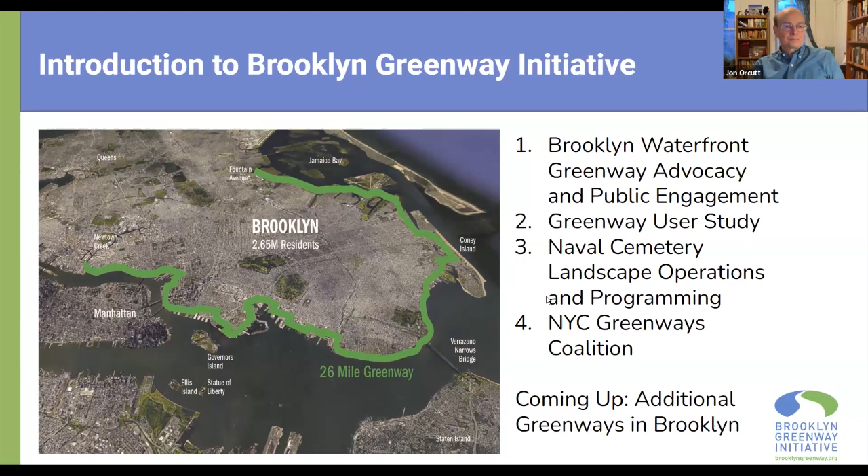So we have declared 2024 the year of New York City Greenways, because there is so much happening in greenways this year. Starting off, our 20th anniversary, as I mentioned, really looking to build enthusiasm around that. The completion of the citywide greenways plan this December—we'll be talking more about that in this presentation.

And then also another big milestone that we're excited about this year is the release of the Brooklyn Waterfront Greenway user study. And so with that, we'll hand things over to Rob Pirani, who will be giving a bit of the history of Brooklyn Greenway Initiative.

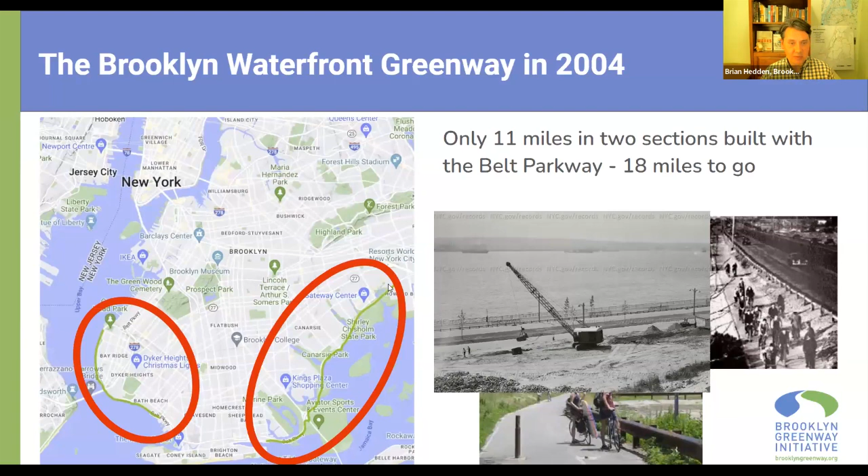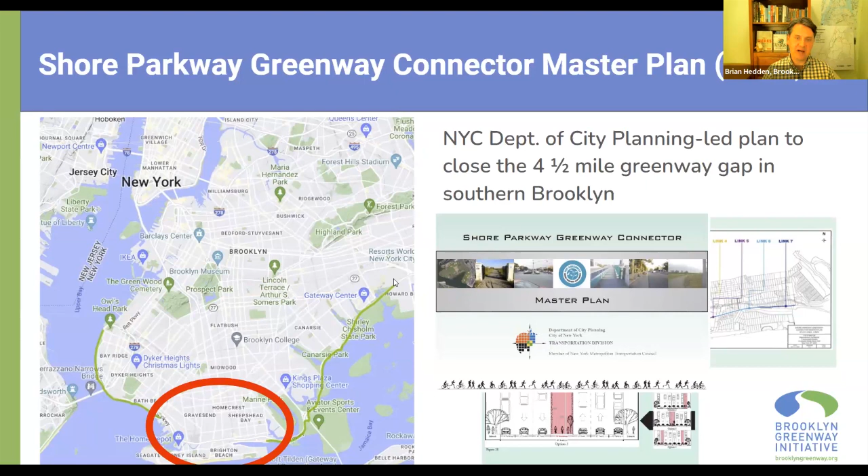You had 11 miles and 2 distinct sections, and there was a big gap in the middle - nothing that went further north than Bay Ridge. So at that point, you got a couple of different plans over the next few years to address that gap. One was led by the city administration, the Department of City Planning. They did a study and published a plan, the Shore Parkway Greenway Connector Master Plan, focused entirely on closing the 4.5-mile gap between Bath Beach and Sheepshead Bay. Also, as we've been talking about, you've had a number of years of advocacy spurred on by BGI and other activists.

As Jon talked about, the Department of Transportation did the comprehensive study and published the Brooklyn Waterfront Greenway Implementation Plan. That's where you detailed the routes, the rights-of-way, street design layouts, for 14 miles of waterfront from Greenpoint to Sunset Park. That really set up the blueprint for how to get the Greenway done project by project.

So if you skip ahead to today, the result of that has been there are now 10 new miles of Greenway along the Brooklyn waterfront where there used to be 11. So it's now 21 miles done out of 29. 8 of those miles were done in Northern Brooklyn, coming off the implementation plan's blueprint. The other 2 miles were done in Southern Brooklyn, basically close to a form that was envisioned by that Shore Parkway connector plan, and also with a little bit of a boost from the Jamaica Bay implementation plan that Jon referenced.

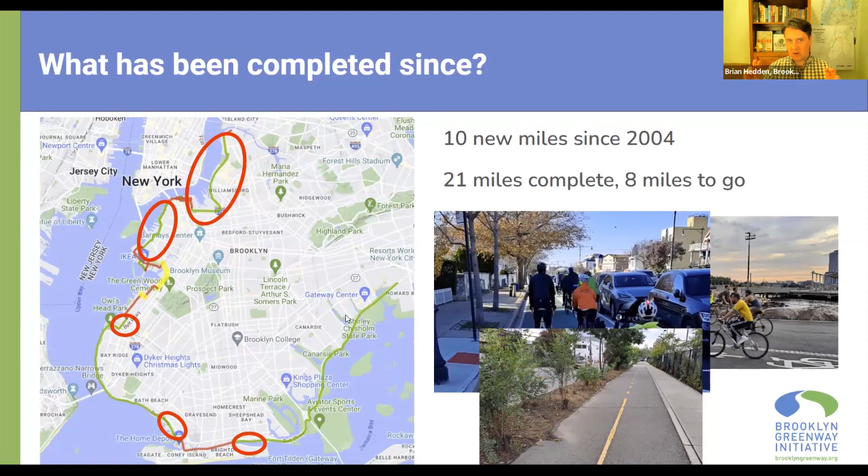I also want to break this down a little bit in terms of what are we considering a completed segment of Greenway, because it really helps to think about how we want to look at the future segments of Greenway as they're getting done.

One of them, and this is really just in Brooklyn Bridge Park, a little bit of off-street park trail that managed to get done as part of the whole 29-mile project. That is fully off the street grid. It's into the park, it has direct access to the waterfront, and that is for the park that runs by the bridge between Piers 1 and Pier 6.

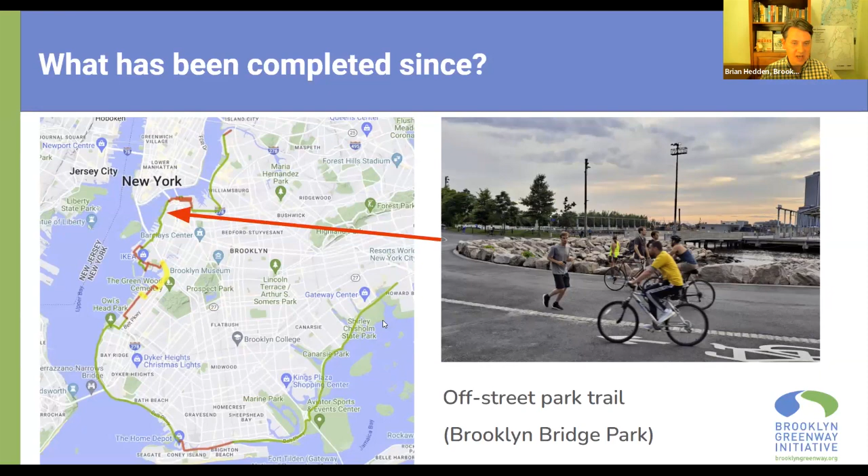A lot of what was envisioned by that implementation plan was the grade-separated and landscaped Greenway path. This is because a lot of the waterfront space and prospective park space in Brooklyn is already spoken for. A lot of what the Brooklyn Waterfront Greenway, in Northern Brooklyn in particular, does is run along the city street grid and connect park and waterfront destinations to each other rather than running directly on the waterfront itself. That's a case where you see the streets being reconfigured to bring in this idea of a linear landscape path through the borough.

So in the photos we're looking at here, you're looking at a sidewalk and a bike path that are at the same grade. They're separated from any moving cars, or even separated from parked cars, with trees, with plants, and with a raised curb.

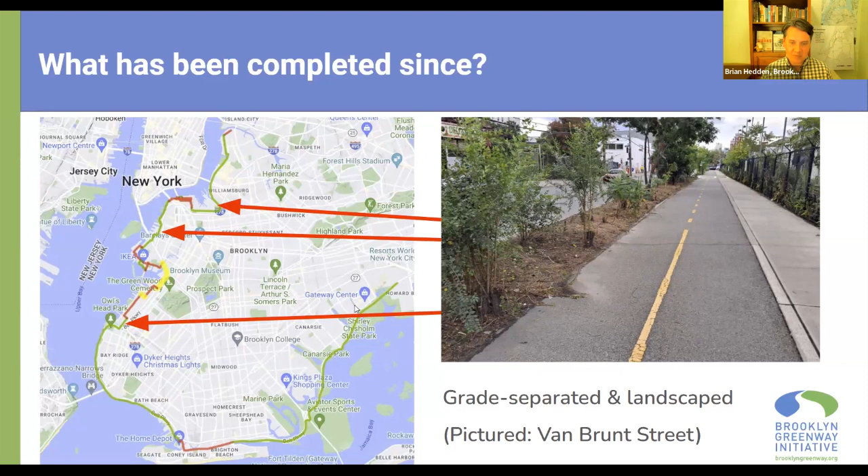Here in the last 20 years and the 10 new miles, you'll see this sort of Greenway on the perimeter of the Brooklyn Navy Yard and on the perimeter of Brooklyn Army Terminal, and then further along into the Columbia waterfront on Van Brunt Street. These kinds of projects are the big ones. These are the capital projects that are expensive and take a lot of time, as Jon was talking about, maybe too much time, but when the opportunity is there, it's worth it, and you get a really nice piece of Greenway and linear park out of it.

Then the other part, as Jon was talking about, there's the protected two-way bike path. It's the cheaper and faster way to bring safe and comfortable biking infrastructure to a Greenway route. Bikes here are physically separated from moving traffic with either concrete Jersey barriers or parked cars. This picture is from the ribbon cutting day at Emmons Avenue in Sheepshead Bay. This method has also been applied on the Shore Parkway Service Road in Bath Beach and Gravesend, and also on Kent Avenue, north of the Navy Yard in Williamsburg.

This is something that brings the Greenway to a usable status. It really opens up the number of casual users that are able to use it. But on the same side, it's not necessarily that landscaped linear corridor that we'd like to see as the ideal. Even though this is a tool being used to complete the Greenway, it doesn't mean the city can't go back in after the fact and essentially upgrade it to that landscaped, grade-separated status.

And that really is effectively what happened along the Navy Yard perimeter. The Greenway started off in its first few years as a protected bike lane there, and then eventually was upgraded through that capital project, which took several years of planning and funding and construction to get done.

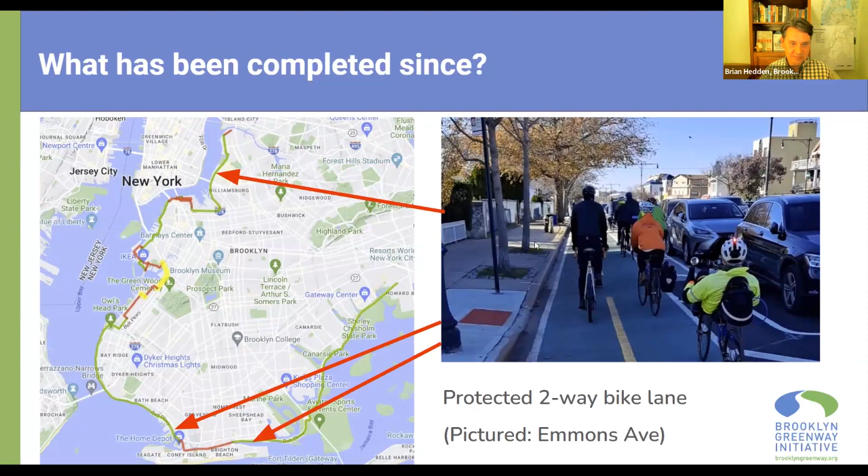So with all of that, it's now 21 miles out of 29 complete. What's in the pipeline? What's the prospects for getting those last 8 miles done?

I want to highlight a few projects that lead into 4 miles of Greenway that we're pretty optimistic about. They're in construction, or in the pipeline to become construction, or very close to going into that pipeline. We're optimistic these Greenway segments can open up in the next few years. Not necessarily this year, in most cases not next year, but before we start calling out years with the words 2030, these 4 miles should definitely be set, we hope.

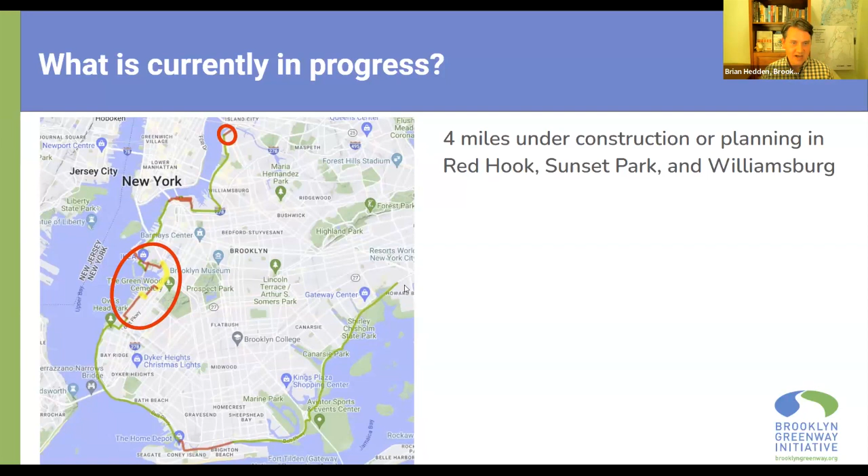So with that, I'll start with Hamilton Avenue and 3rd Avenue down to 29th Street. This is an example of a Greenway project under construction. You wouldn't necessarily know that to look at it because it's tied into a lot of underground water utility work, and that work is what's really driving the length of the construction time needed here. Construction actually started in 2021.

Part of the delay here is that a lot of these projects rely on underground survey work that isn't really proven right or wrong until they start construction and start digging. In this particular case, they found out the surveys were wrong, and that ended up causing this project to go into further redesigns and further delays. The current estimate is completing this in early 2025. But I'd say with all of these capital projects, every construction estimate comes with an asterisk because it can come with delays not currently planned by the agencies building these out.

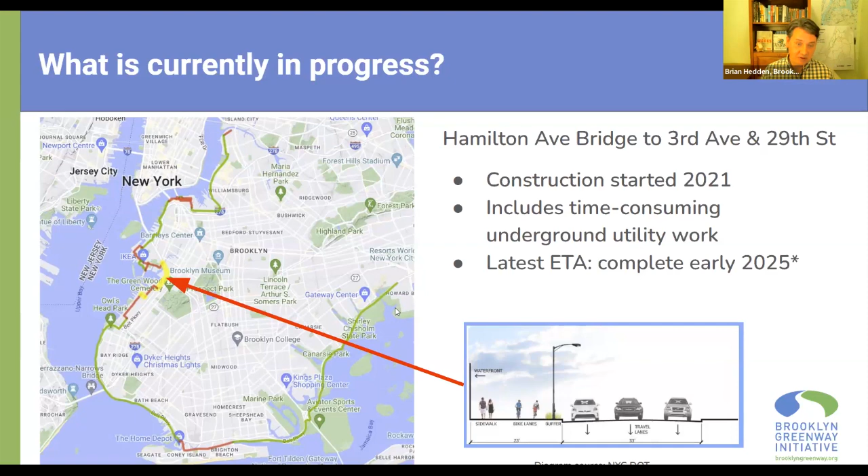But the short story here is that construction started, it will get done sooner or later, and we're excited about that. In Red Hook, there's another big chunk of this Greenway in the pipeline to go into construction in the next couple of years, as part of the broader coastal resiliency and coastal flood mitigation projects. In Red Hook, this was kicked off as a result of Hurricane Sandy, and it's a project that's been studied and developed for an infrastructure project much, much bigger than just the Greenway itself. But the city government made it a point of incorporating the Greenway as part of this project so they don't spend hundreds of millions of dollars on something and then lock the Greenway project out of it.

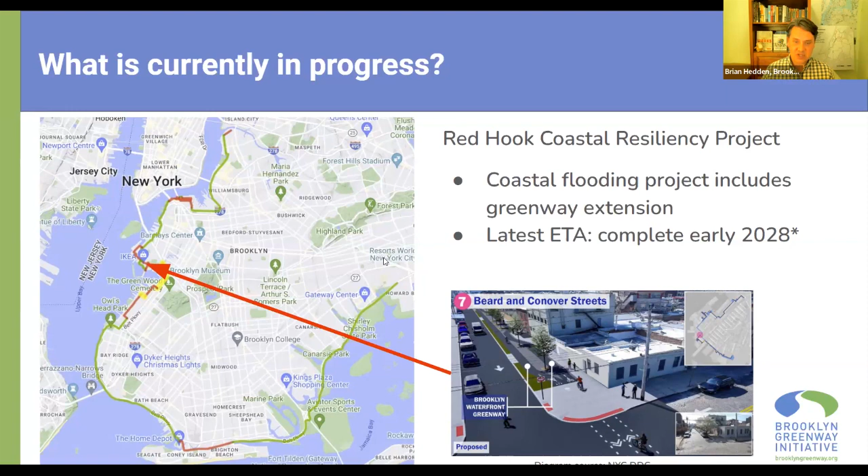The Greenway project will be part of this, and it's nearing its final approval stages. I think it's past ULURP now, for those people that are policy nerds about city land use. It's gone past the borough president, and I think it's left to the city council at this point. The construction timeline right now is estimated for this to be done in 2028.

And then in Sunset Park, there's a couple of bigger projects and a couple of smaller projects. Three of them are essentially in the pipeline to begin and get finished, and then that fourth one is something that's just on the cusp of that.

So I'll start with the northern part of Sunset Park, that's 29th to 39th Streets. There's a project that has been initiated, designed, construction has been funded, and construction is going to take place. It's anticipated to happen throughout the course of next year and in 2026, and be complete at that point.

So that, along with the Hamilton Avenue and 3rd Avenue project, will bring that part of the Greenway all the way down to 39th Street, where there's a small, basically 1 or 2 block connector. It goes from 2nd Avenue to as close to the waterfront as it can go. That project is almost done, and it's effectively usable for walking and biking now, even though there's no ribbon that's been cut on it.

And then all the way down at the southern end of Sunset Park, there's the 58th Street connector between 1st and 2nd Avenues. That had been reviewed and approved about 6 years ago, but the construction project was held back for a period while they were working on other aspects of the Brooklyn Army Terminal retaining wall. So all those 3 projects are essentially in the pipeline to get done in the next few years.

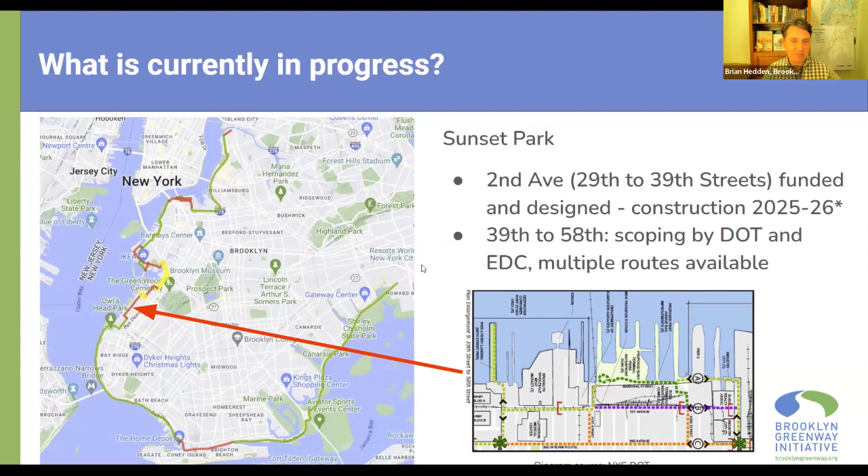So, we're again a little more cautiously optimistic here, but we're excited about the possibilities in Sunset Park.

Moving along, Williamsburg is another project where the last few blocks of Commercial Street got opened up by a residential construction project that finished a couple years ago. They had been blocking off the northern end of West Street while that construction was taking place, and that's opened up now. It's really freed DOT to take a look at the design for finishing what's already in the implementation plan.

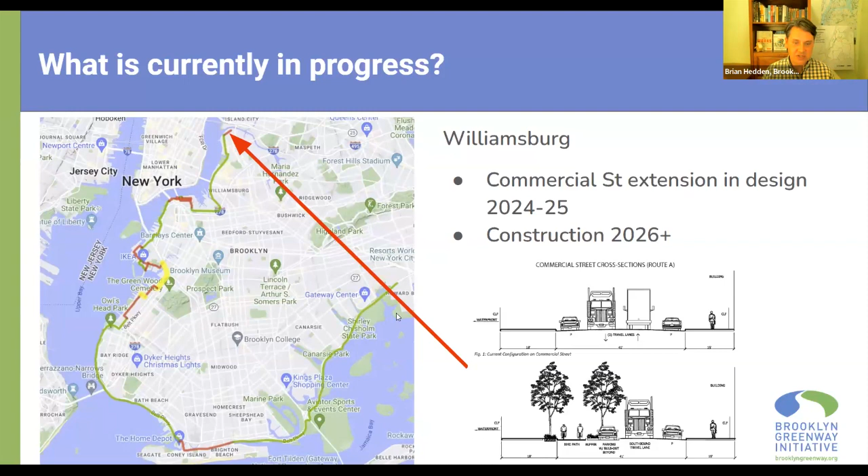Right now they're planning on probably being in design for another year or two, with construction starting, hopefully, with an asterisk, in 2026. That brings us to the last two sections of the Greenway that don't really have projects attached to them, or anything in the pipeline that would result in a completed Greenway.

The first one I'll talk about would be Dumbo and Vinegar Hill, because there are actually projects happening here, though not ones we'd consider something that would complete the gap in the Greenway between Brooklyn Bridge Park and, say, Navy Street or Sand Street. Those projects are to make it easier to bike in traffic on the city streets.

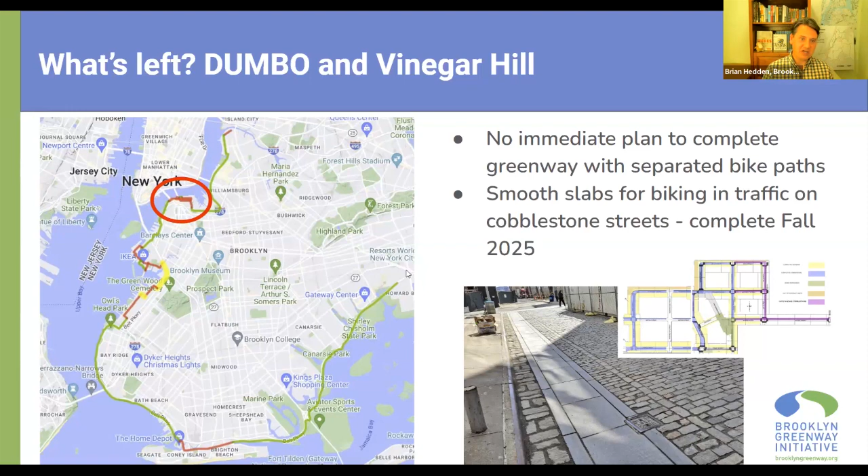The DDC is essentially going in and adding these smooth slabs to act as bike lanes on cobblestone streets, making it a little easier to bike on. You've seen a lot more of these pop up in Dumbo and Vinegar Hill over the past few years, and the expectation is that all the planned ones will be done next year by the fall. So it's not really going to result in a completed Greenway, but it will make the environment a little easier to bike on.

And then the last gap is Coney Island and Brighton Beach. This old gap used to be 4.5 miles, and now it's a lot smaller, down to 2.5 miles. But there's not really anything in the pipeline that will definitely lead to construction. There's nothing we feel particularly confident saying will definitely get done. This will get done when there's a coalition that effectively raises their voice and makes it known that this is a priority project. Right now, you have a number of painted bike lanes that span this 2.5 mile gap, but they are, for the most part, blocked almost all the time.

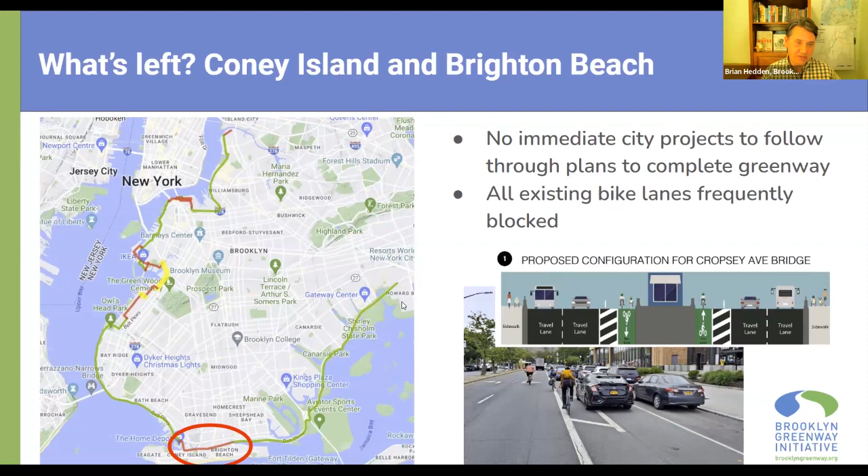Moving away from the Brooklyn Waterfront Greenway for a bit, I know Hunter and John both talked about the citywide Greenway plan. BGI was part of the New York City Greenways Coalition that was instrumental in getting the legislation passed by the City Council that's going to lead to the first new citywide Greenway plan since the Dinkins administration.

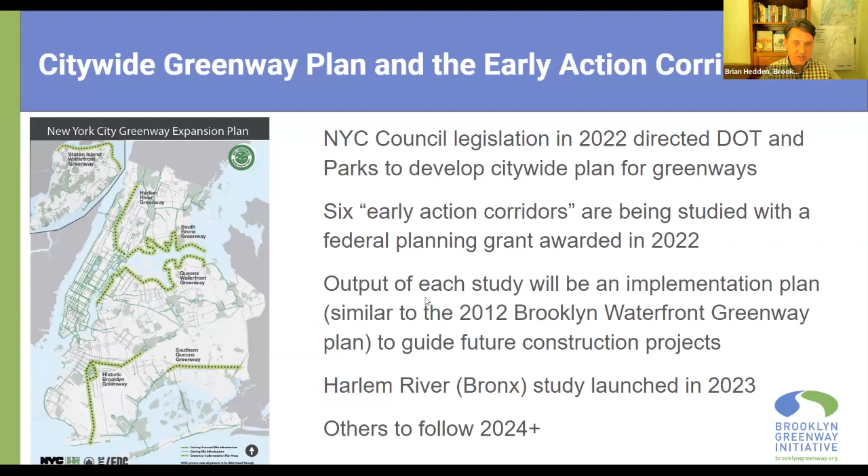The one taking place in Brooklyn, they're calling the Historic Brooklyn study, because it's focused on the existing greenways that were the oldest — Ocean Parkway and Eastern Parkway. In addition to bringing those 2 greenways up to a modern day standard, they're also looking to extend that and connect Eastern Parkway to Broadway Junction and to Highland Park.

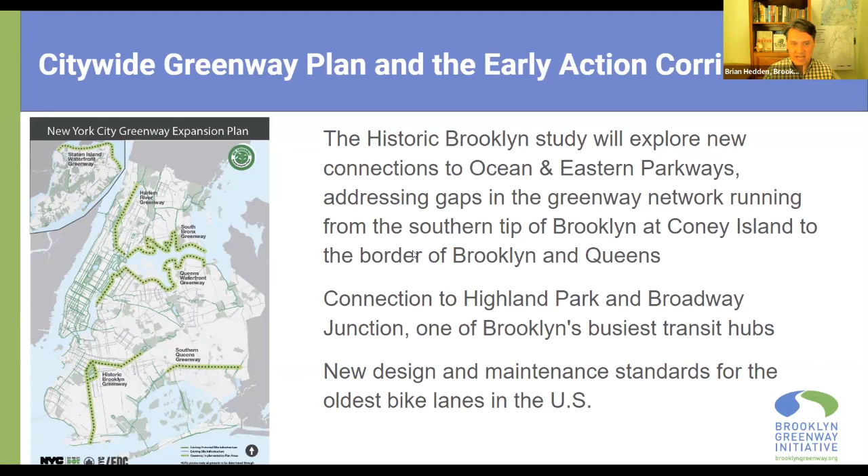I mentioned before the idea of taking those protected bike lanes and upgrading them to a higher form, like grade separated and landscaped. There are a couple of different initiatives. One is actually led by the city and has a bit more of their buy-in, and the other is led by grassroots activists that does not currently have any particular buy-in from city agencies, but certainly has enthusiasm and support from elected officials.

The first one is in Southwest Brooklyn — Destination Greenways. This is a Parks-led project to upgrade the connections along the Leif Ericson Greenway corridor, and along the Brooklyn Waterfront Greenway facing Gravesend Bay, hopefully leading to better connections to Coney Island. I'd highlight that this has been funded — the parts on the west portion here, projects 1, 3, and 4. So Leif Ericson and the Bay Ridge Greenways have been funded, and construction is expected to be complete in 2027 or thereabouts. Again, it's something with a long lead time and some asterisks attached.

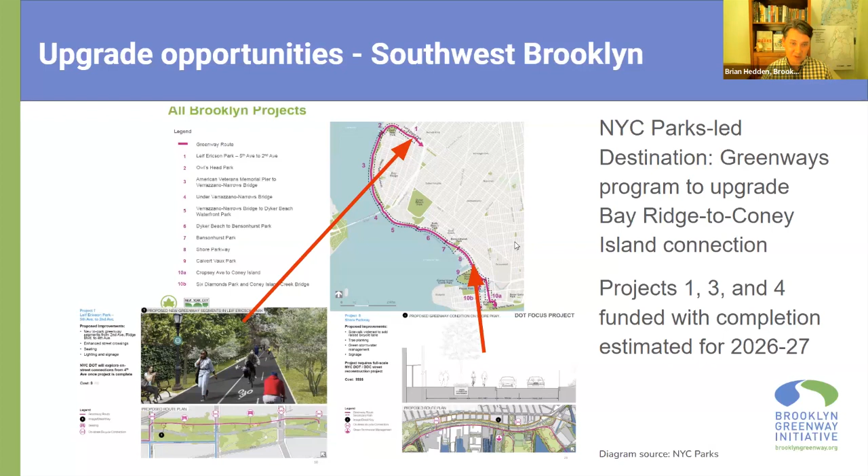The other projects you see here, projects 5 through 10, don't have any funding attached to them. Until there's some allocation, it would have to come either directly from the mayor's member items, the borough president, or council members. It's a little bit like a fairyland project — another one of those things we'd like to build a coalition for and get support for so it can actually happen.

The other project, which John alluded to a bit, is taking the Kent Avenue section. This is an initiative of grassroots activists in Williamsburg and Greenpoint, making a point of upgrading a space that has become one of the busiest used sections of greenway or bike infrastructure anywhere, and increasing the amount of space available for both bikes and pedestrians.

This is the bit I wanted to come back to, from the Q&A a little earlier. There are some maintenance challenges for the greenways that come in a few different categories, and a lot of it stems from a mismatch because different agencies manage different sections of greenways. Those agencies are good at their primary function, but not as good at the functions they're not supposed to be doing.

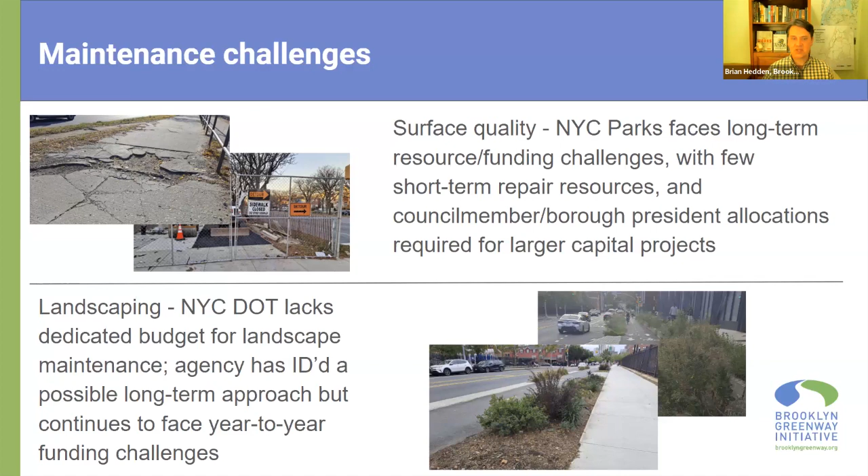That said, there actually is a fair amount of partnership with sanitation between them and DOT on snow removal and ice maintenance. Again, parks, just because of the structural challenges their agency faces, they're still having difficulties with resources and funding there.